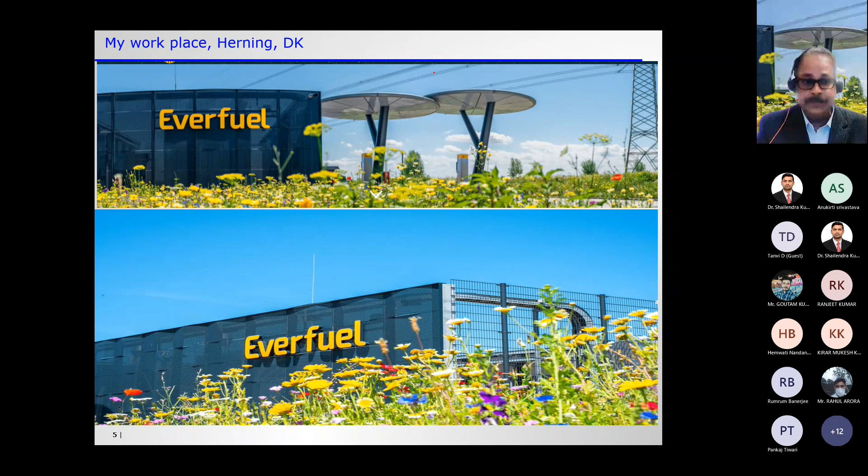Then after this, we will have a short exercise just before the break or after the break. And then we will deep dive into trends in solar and wind energy research, what is going on around the world, and what needs to be done in this solar and wind energy area. Then finally, we will look into the role of green hydrogen in grid stabilization and how it can help. Then again, we have a short exercise and then the conclusion. And after, if time permits, we will take multiple questions.

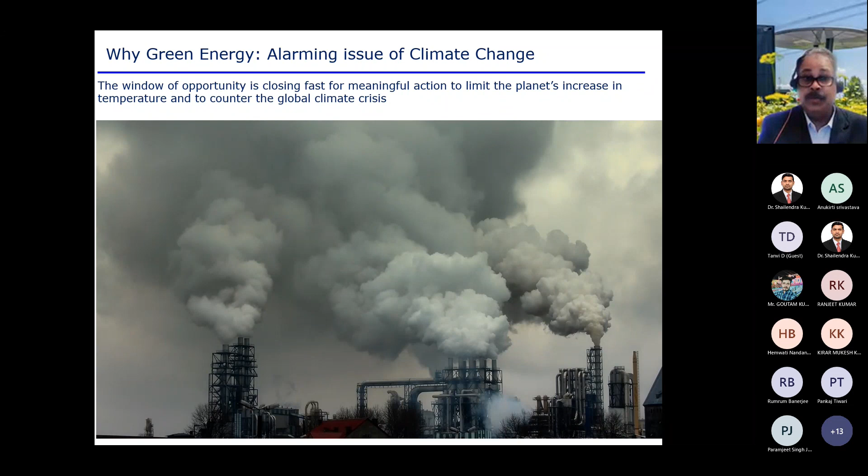So why green energy? What are the alarming issues of climate change? As I stated earlier, the window of opportunity is closing fast for meaningful action to limit the planet's increase in temperature and to counter the global climate crisis.

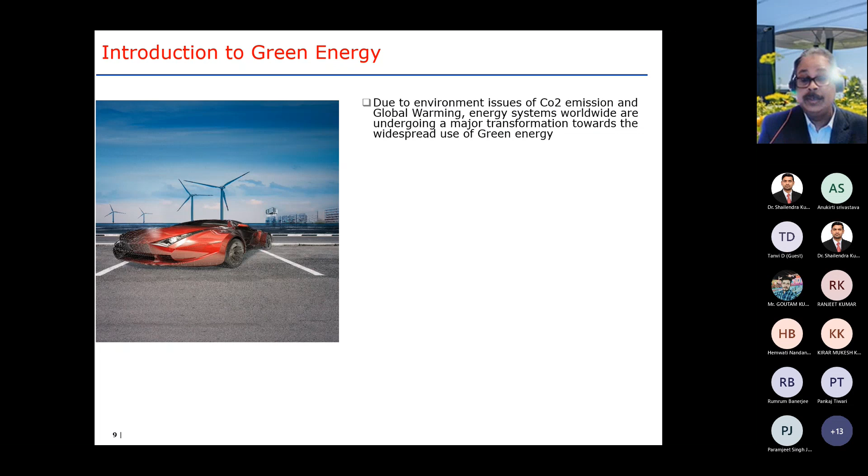We know that we can define green energy and why we need it because of environmental issues, carbon emission, carbon dioxide emission, and global warming. Energy systems worldwide are undergoing a major transformation towards the widespread use of green energy. The electrical power system in a sustainable future will augment the centralized and large grid-dependent system of today.

So forget about this 1,000 megawatt NTPC coal-fired plant, because they are now trying to convert this. There were some tie-ups with Shell and NTPC. They were trying to convert their gas turbines with hydrogen firing gas turbines. So even their existing network is converted to this green energy based generating station. So these big powerhouses with fossil fuel are the talk of past days.

To achieve this, world will increase and adopt renewable energy sources - solar, wind, and their application in terms of fuel cells. Power electronics is essential for harnessing energy from solar, wind, fuel cell, or other green energy sources. Converter, inverter, and solid state transformer - they are a must.

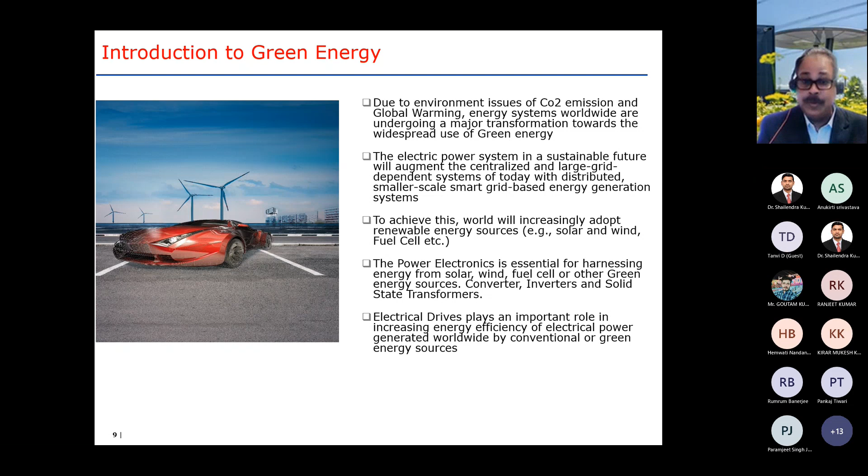Being in our community of power electronics, we must be proud to say that we are helping the energy transition of the world and saving the planet. We are the savior. Electrical drives play an important role in increasing energy efficiency of electrical power generated worldwide by conventional or green energy sources.

So what are the future green energy systems? The future energy system must necessarily deliver on three dimensions. First is providing safe, secure, and reliable energy while delivering access to all energy consumers. Supplying energy at affordable prices and assuring sustainable development.

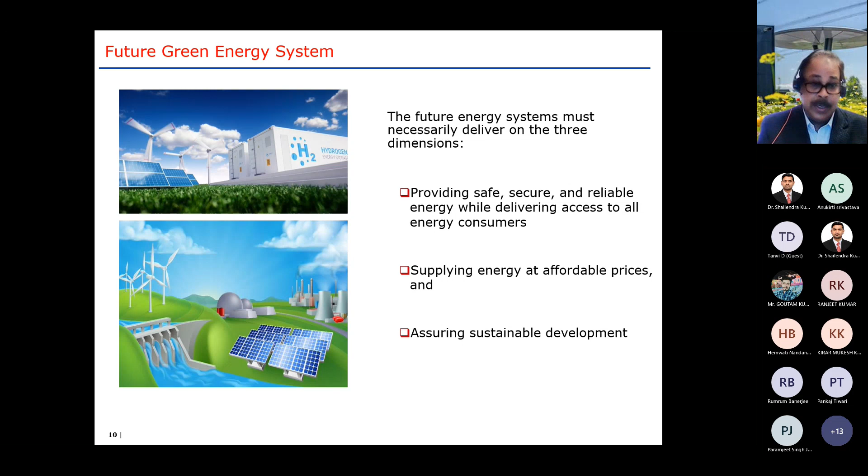And looking at these requirements, we only rely on renewable energy sources like wind, solar, hydro, and geothermal, and similar to that.

In order to develop these future green energy systems, this will involve massive changes in technical and organizational level, together with tremendous technological upgrade in different sectors, ranging from the energy generation and transmission system onto the distribution system. Of course, they will require these organizational level changes and technological upgrade.

So the whole world is transforming themselves towards this direction. These actions constitute huge science and engineering challenges and demand expert knowledge in the field to create solutions for sustainable energy systems, where the mismatch between energy supply and demand side and the infrastructure to support this must be addressed. And this must be economically, environmentally, and socially viable by meeting high security requirements.

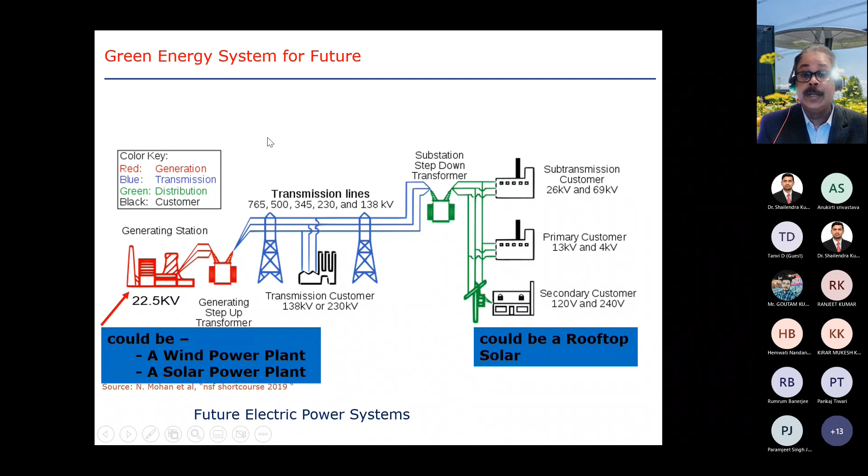So we can see that we don't have this model of generation, transmission, and distribution only, but the utilization - it utilizes some part of this network. They can also come off with feeding power to this network. So we need special consideration for the stability of the grid, and that can only be augmented when we incorporate, other than our existing customer, that electrolyzer plant as a load. So we can ramp up the hydrogen production and ramp down the hydrogen production in order to keep the electricity stable.

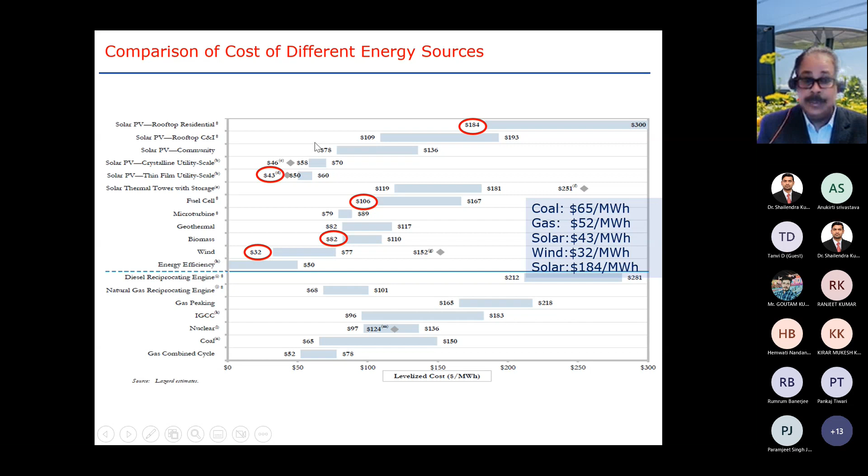When we have these green energy sources and need to connect them, we need a smart grid. In simple words, we can define this smart grid as local, so it creates energy for itself or nearby customers. It is independent, so it can disconnect from the central grid and operate by itself. And it is smart and intelligent, with the central brain or microgrid controller being where the intelligence originates.

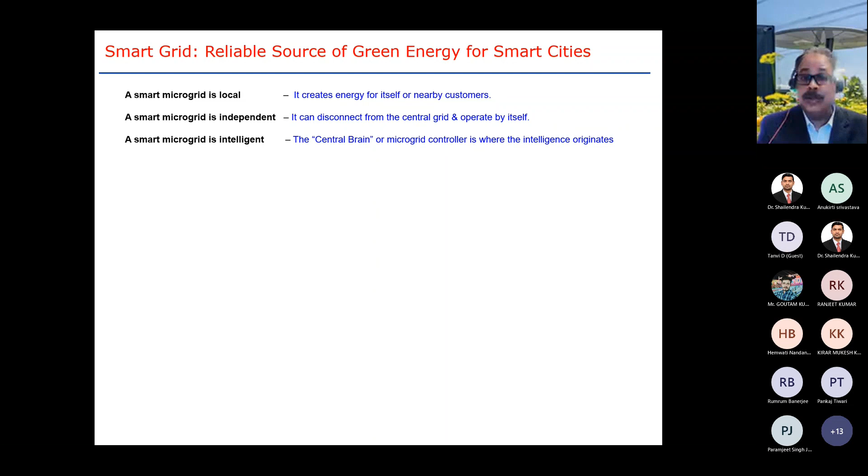We can see here the solar PV or utility plant. It can be connected or disconnected to the microgrid. This grid can have other types of generating sources like solar, storage systems, wind sources, EVs, and combined heat and power units connected here. Then this microgrid is connected with the energy market and also with weather forecasts.

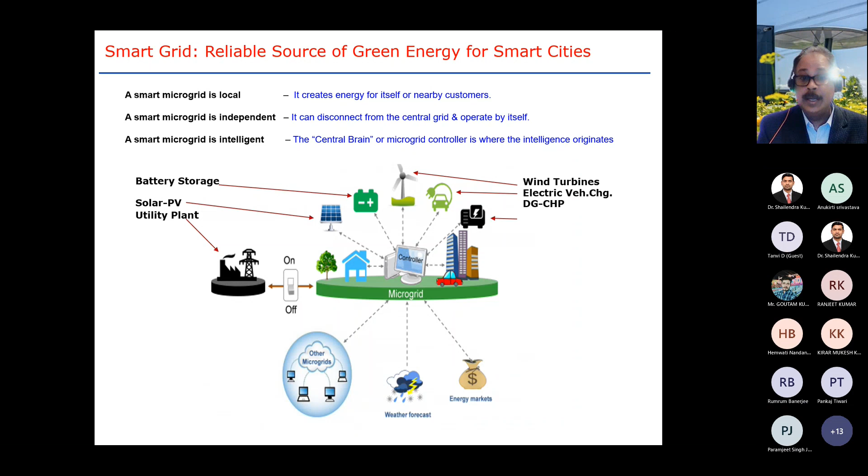This individual small microgrid is connected with other microgrids in parallel in order to have a reliable source of green energy. And this is the model which also supports future smart cities.

So how can we secure green energy sources for the next generation? If we look towards the annual world energy consumption, we can see some numbers from previous years and predictions. In 2009, total energy consumption of the world was 16 terawatt-year per year. You know kilowatt-hour, then you convert to kilowatt-days or kilowatt-year, and kilo to mega, mega to tera.

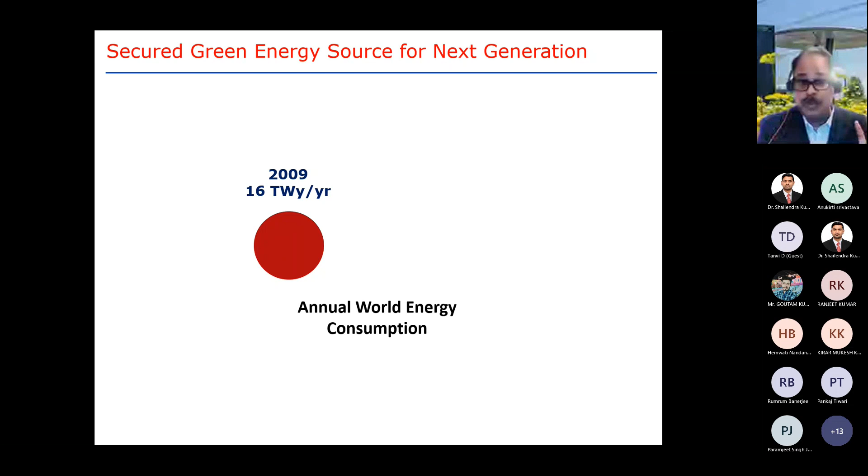So you can see how big this number in energy consumption is. In 2009, it was 16 terawatt-year consumed in the whole year, and there was a 75% increase assumed between 2009 to 2050, with requirement in 2050 being 28 terawatt-year per year.

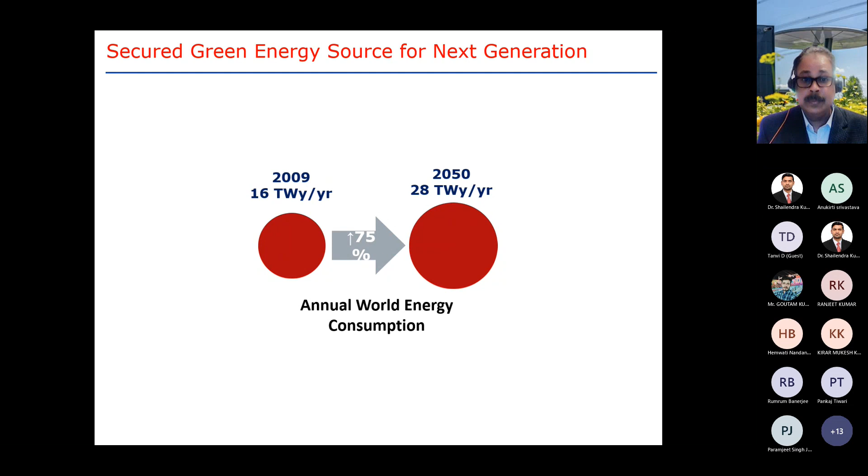So how is our energy reserve? Our total fossil fuel energy reserve in terms of coal is 900 terawatt-year, uranium 90 to 300 terawatt-year. So how many years can we run with coal? About 30 years, maybe 10 to 20 years with uranium, natural gas about 5-7 years, oil maybe 8 years, by this kind of prediction.

Hydropower stations are renewable, and they can provide 3 to 4 terawatt-year per year, so there is no limitation and we can get continuous energy from there. Wind also has the potential to provide us 25 to 70 terawatt-year per year. If we look at our demand of 28 terawatt-year per year, we can see that wind can meet this demand, and if we can build infrastructure based on wind, the world can be sustainable.

But if you look at solar availability, that is 23,000 terawatt-year per year. And if you see the capacity in terms of bubbles, these bubbles show relative size compared to energy demand needed, so this bubble will be like this. That's why when it comes to renewable or green energy, there is no limitation.

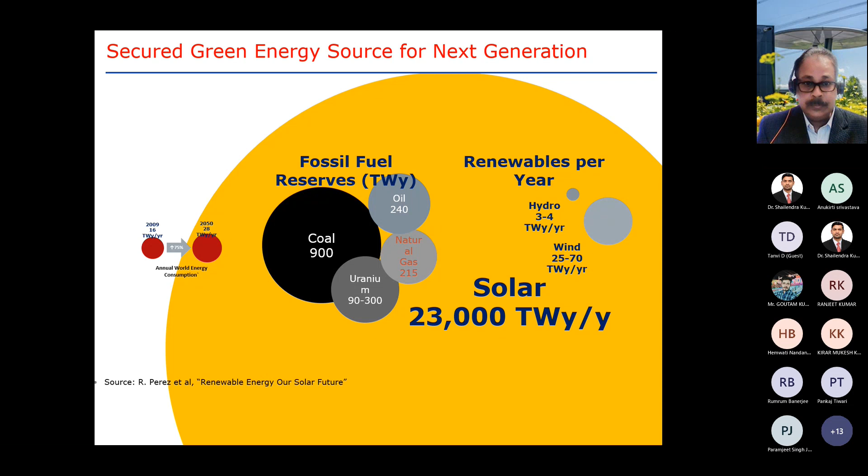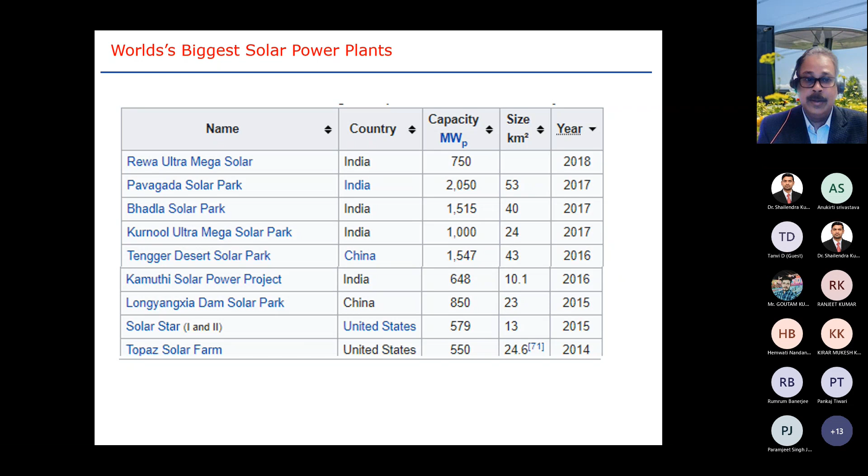If you look at some of the world's biggest solar power plants, most of them exist in India—whether it is Rewa Ultra Mega Solar, Pavagada, or Bhadla Solar Park, they are in India, and we own them.

If we look as a whole at the growth of the primary energy market from solar PV plants, you can understand it with these colors. If it is a slaty color, then it's no data or 0%, yellow is 0.1%, pink is 0.8%, and dark red is 1.2%. In this graph, you can see India is positioned very well, having more than 1.2% penetration, and the growth is continuous.

That is phenomenal. As I stated earlier, in the next few years we will be self-sufficient in energy needs, and already more than 60% is coming from renewable energy. That's a proud achievement for us.

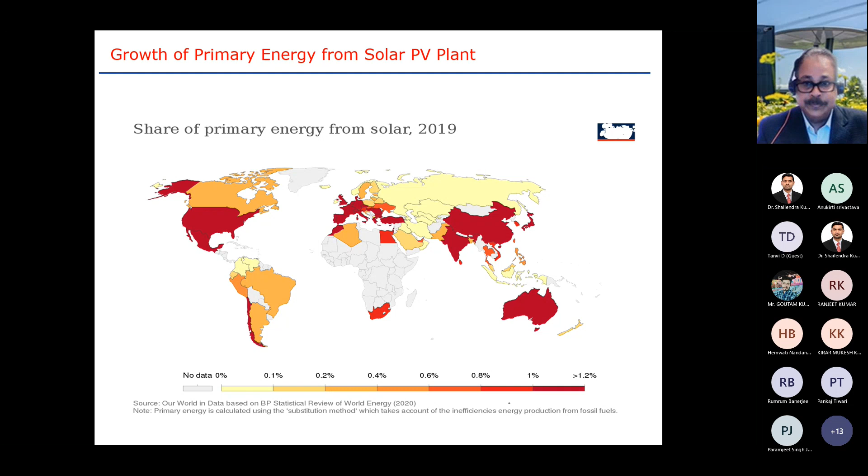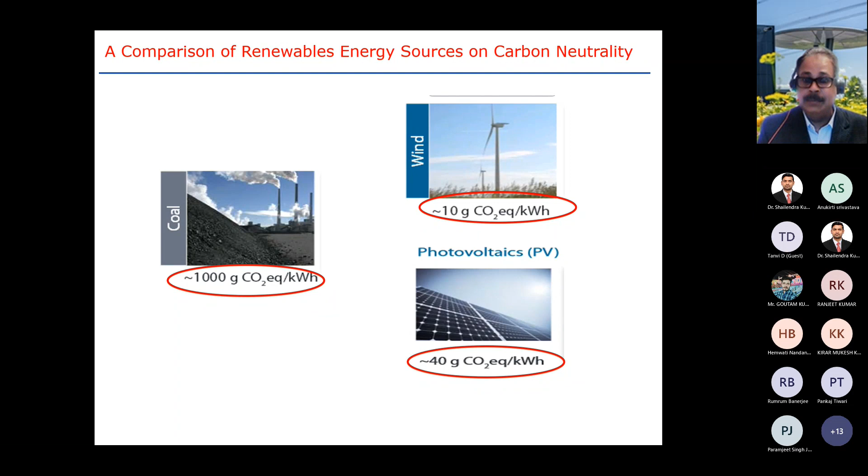Anybody can tell why wind is much cleaner compared to photovoltaic? Because the carbon emitted during the fabrication of photovoltaic panels is far, far greater compared to what is needed for making blades and the total carbon footprint of installing a wind plant.

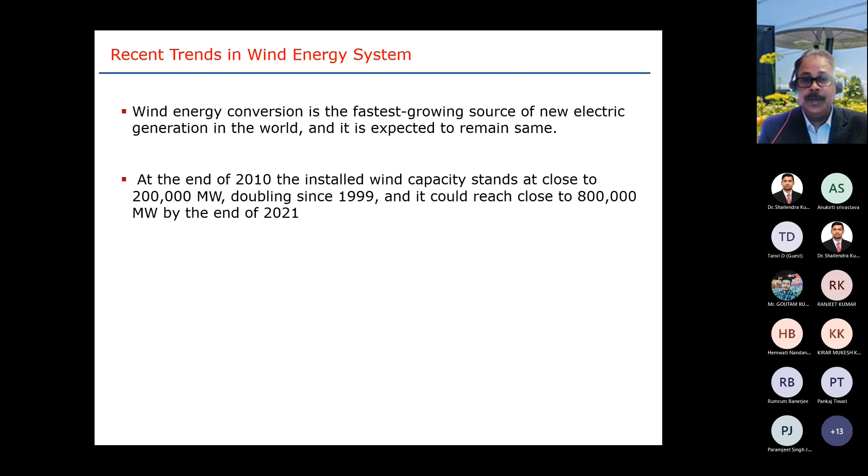So what are the recent trends in wind energy systems? Wind energy conversion is the fastest growing source of new electrical generation in the world, and it is expected to remain so. At the end of 2010, the installed wind capacity stood at close to 200,000 megawatts, doubling since 1999, and it could reach close to 800,000 megawatts by the end of 2021. The world is observing a growth rate of more than 10% each year, and today 5% of world electricity comes from wind power.

Please note that this is not the case for Denmark, because sometimes it happens that we are running our full grid generation based on wind, and sometimes we need to curtail the wind power - so much power coming from the wind plant that we need to curtail it.

And that's why when it comes to green hydrogen, this collaboration between India and Denmark is playing a great role, where the brightest minds of both countries are working towards a sustainable solution for green hydrogen, where prices will be less than $1 per kg. And that dream is not far away, because there is a lot of commitment from both sides.

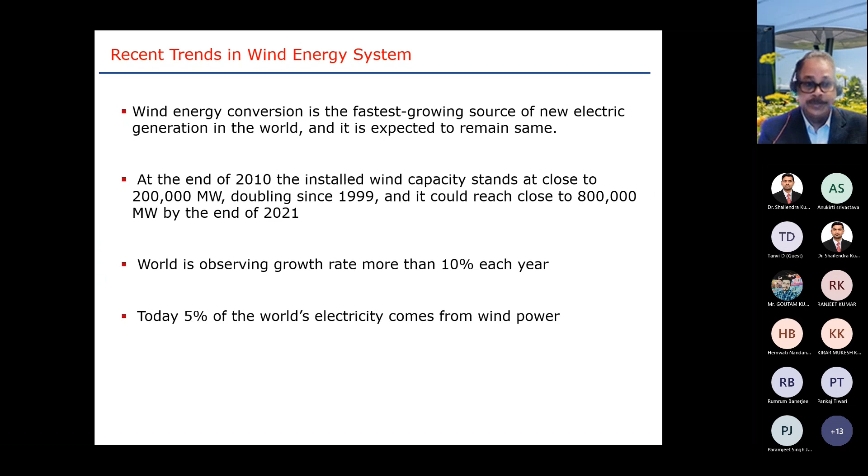And companies like Everfuel are also having very promising plans - in the next 3-4 years, they need to build around gigawatt capacity electrolyzers, and they need to provide green hydrogen station infrastructure for hard-to-abate sectors like heavy duty trucks and buses.

So these are the numbers I was talking about, and you see there is negligible growth in their footprint until 2000. But suddenly, the world is more and more cautious, and then you see this exponential growth, which is going beyond 800,000 megawatt, and it is going further.

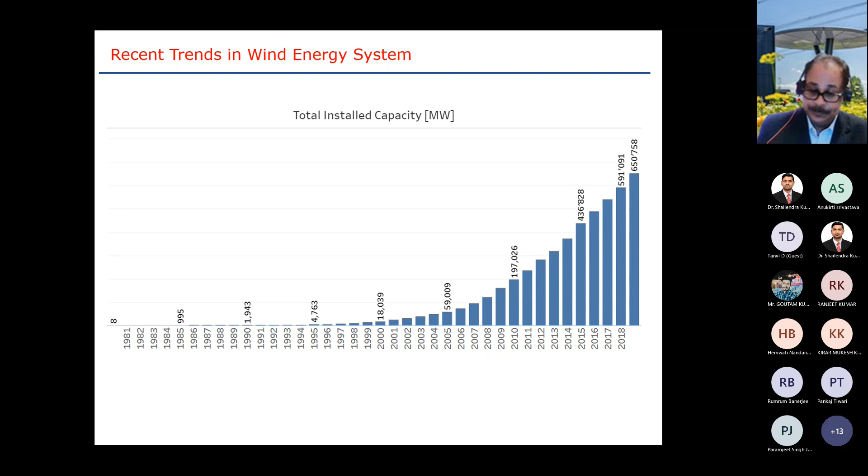So when we say that, what are the recent trends in wind energy systems? Harnessing wind energy for electrical power generation is an area of great research interest, and emphasis is given to the cost-effective utilization of this energy resource for quality and reliable power supply.

During the last two decades, wind turbines have been developed in size from 20 kilowatt to 12 megawatt, while even larger wind turbines are under investigation. A lot of different concepts have been developed and tested. One important development is on the electrical machine, the generator, where new concepts have also been industrially implemented.

Before moving to this part, I would like to mention that a new trend comes in the wind park and wind plant, where the power we generate is first converted to DC, then through a converter, and then using long cables connecting to the grid. And that grid supplies data centers or big consumers of electricity.

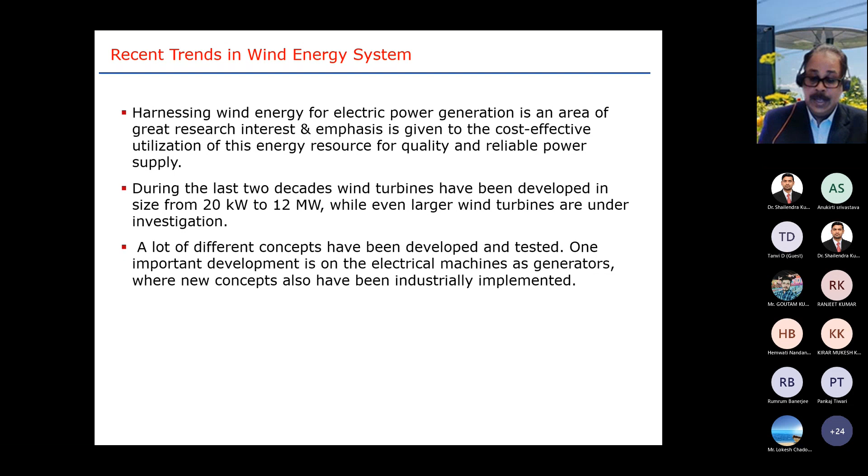So I was talking about what research trend is in the wind energy system, and that mainly it is going on the machines, and then which machine is used as generator. And if we see this comparison, we will find how this trend is going on, but I will come to that in the next slide.

Before that, there are some conclusions, like an important issue for wind turbines is the efficiency. Efficiency is important when comparing different systems, because losses reduce the average production by the wind energy converter and thereby reduce income. The various wind energy converter systems are able to obtain maximum power output for varying wind speed. Moreover, wind turbine and generator adaptation should also be taken into account. The generator choice is based on turbine size and wind class.

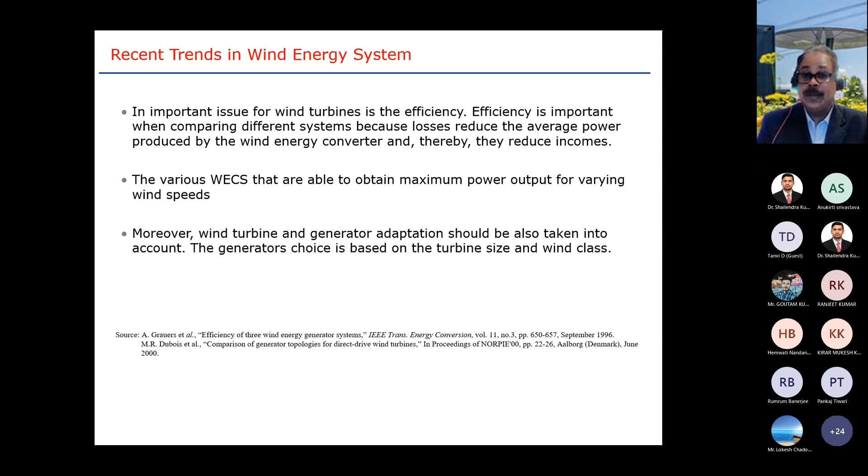So if we look at it, we see that the doubly-fed asynchronous generator was introduced worldwide in the 90s, and then the world shifted towards the permanent magnet synchronous generator, direct driven or geared. So we increased the efficiency by a large amount, but nowadays we are talking about superconductor based generators, and there are some pilot plants running offshore near the UK, and DTU, Denmark Technical University, is supporting such research investigation with Siemens.

And this is possible because in a synchronous generator, we have our stator winding. It is stationary, and it can be cooled by special means, and then we can reduce the ohmic losses in the stator winding. And that way, we will have great power quality. We have efficiency at all loads, and of course it is smaller and lighter, and we can also avoid the gear, and subsequently we can avoid the losses.

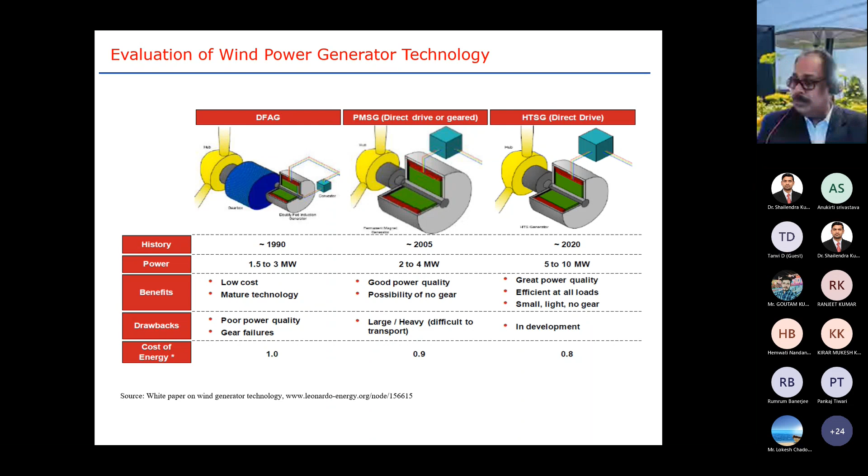So according to time management, I have 10 minutes more, and then we will jump to our first assignment.

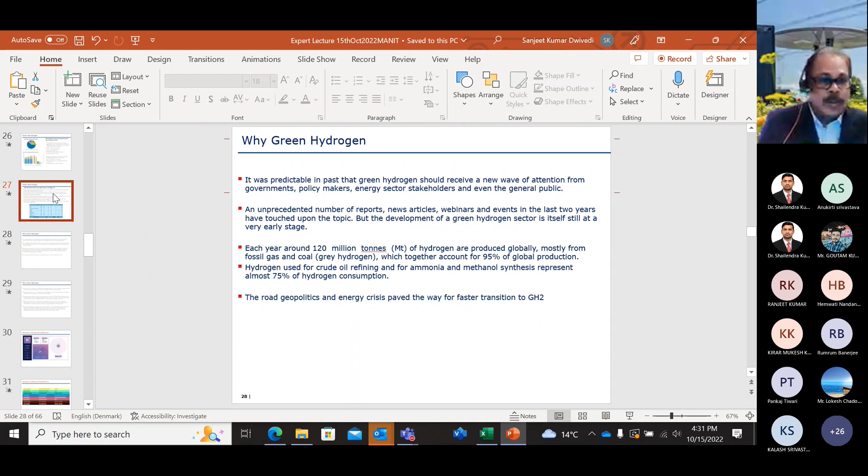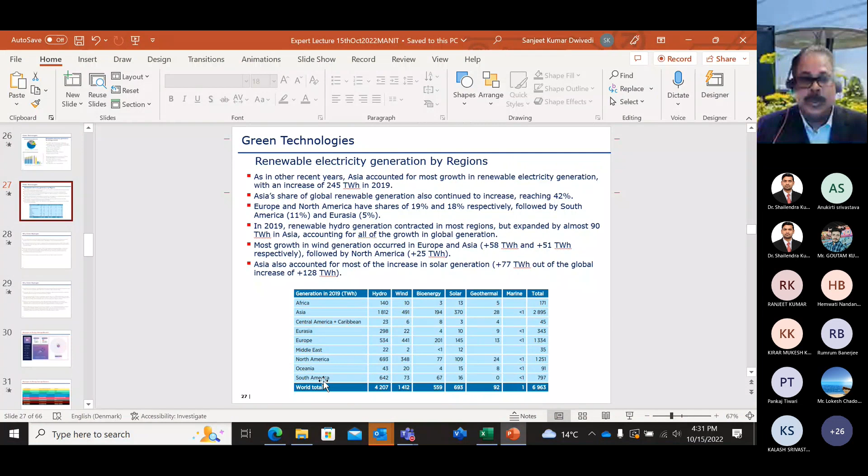So we were talking about green hydrogen, green technologies, comparison of that, and then we move to renewable electricity generation by region. These numbers are quite interesting, and we can be proud that Asia is leading in renewable electricity generation. Of course, the major share is from China, but India is also coping up and contributing. If you compare North America, that is 693, but 1812 terawatt hours are generated from Asia. Similarly, Europe is 534, so Asia is more than 3 times.

And most of the energy is from hydro, wind, bioenergy, solar and geothermal energy. I was only comparing the hydro energy part, but if you see the total, this is around 3,000 terawatt hours from Asia, and from North America it is around 1,250 terawatt hours. So more than 2 times. From Europe, it is 1334, so again more than 2 times.

Asia also accounted for most of the increase in solar generation, 77 terawatt hours out of the global increase of 128 terawatt hours. So most goes to Asia. Growth in wind generation occurred in Europe and Asia, 58 and 51 terawatt hours, followed by North America. Europe has a geolocation that supports wind. Most European countries are surrounded by sea, the main cause of wind movement, so wind generation is largely suited to them.

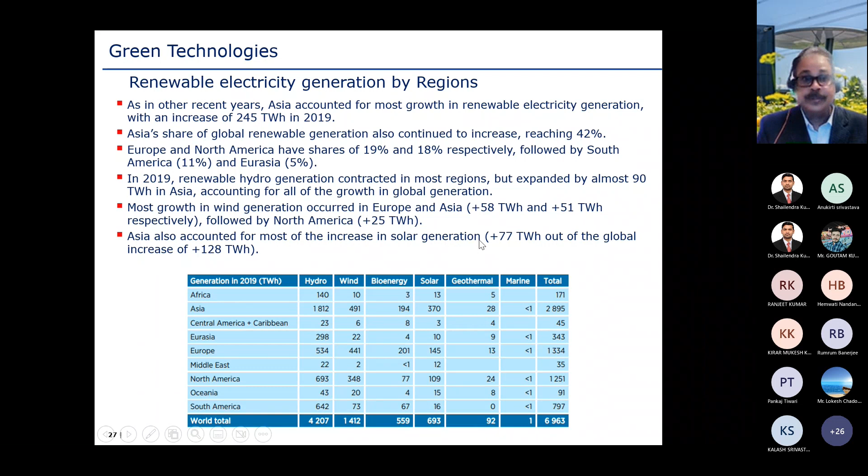In 2019, renewable hydro generation contracted in most regions but expanded by almost 90 terawatt hours in Asia, accounting for all growth in global generation. So after discussing renewable energy, its growth and market share, we again come to the question: why green hydrogen? It was predictable that green hydrogen should receive a new wave of attention from governments, policymakers, energy sector stakeholders, and even the general public. It was predictable, but there was some uncertainty, and I will come to how these uncertainties have gone away now.

An unprecedented number of reports, news articles, webinars and events in the last 2 years touched upon the topic. But the green hydrogen sector itself is still at a very early stage. Each year, around 120 million tons of hydrogen are produced globally, mostly from fossil gas and coal. From fossil gas we call it gray hydrogen, and from coal especially, black hydrogen, which together account for 95% of global production. Hydrogen used for crude oil refining and ammonia and methanol synthesis represents almost 75% of hydrogen consumption. And now comes the reason.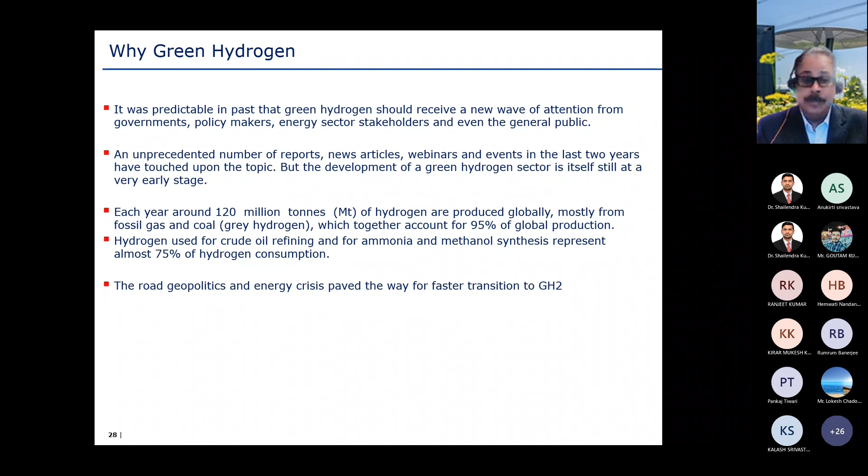So now, real-time developments, the geopolitics and this energy crisis, the Russia-Ukraine war, and many other things created a need from the policymaker side, from the people, and also from the market side. According to the roadmap, every country is having its roadmap. Most optimistic is India's green hydrogen journey, where we want a $1 trillion green hydrogen economy by 2030. By 2050, green hydrogen needs to have far greater dimension than today.

Production reaching 400 million tons, equivalent to 49 exajoules. Producing that much would require a significant scale of electrolyzers, with total installed capacity growing to 5 terawatts. The electricity demand to produce hydrogen reaches close to 21,000 terawatt hours per year. Achieving these ambitious numbers will be a major challenge, but this International Renewable Energy Agency report described that this challenge can be met through a wide range of policies.

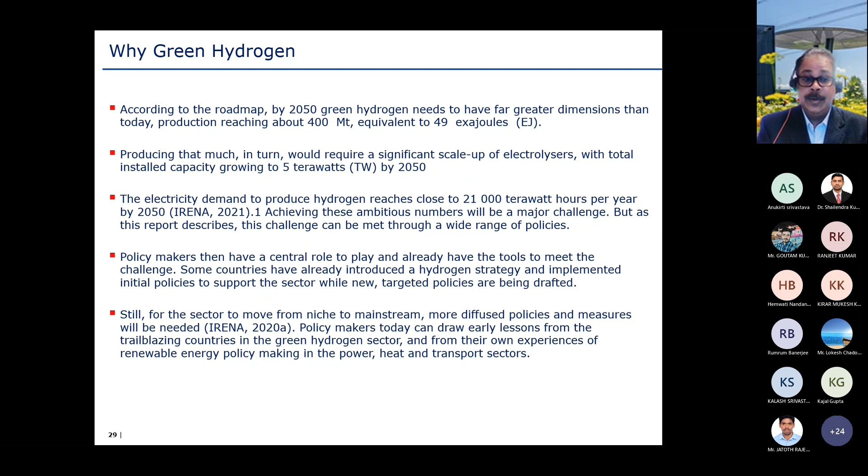Policymakers then have a central role to play and already have the tools to meet the challenge. Some countries have already introduced hydrogen strategies and implemented initial policies to support the sector, while new targeted policies are being drafted. Still, for the sector to move from niche to mainstream, more diffuse policies and measures will be needed. Policymakers today can draw early lessons from the trailblazing countries in the green hydrogen sector and from their own experience of renewable energy policy making in the power, heat, and transport sectors.

So just to jump to hydrogen as an energy element, we see its melting point is 13.81 Kelvin. We know that 0 Kelvin is minus 273 degrees centigrade. So it's 273 minus 20, that is 53, so it is around minus 253. That's the boiling point of hydrogen. So it becomes gas beyond that.

And you see electronegativity is 2.1, ionization potential is 13.598 electron volts. In this configuration, we see that it's a non-metal, atomic weight 1.00794, and other things. Its density is 0.0898 grams per liter. That's very interesting. Please keep focus on this density, because one of our numerical questions comes on that.

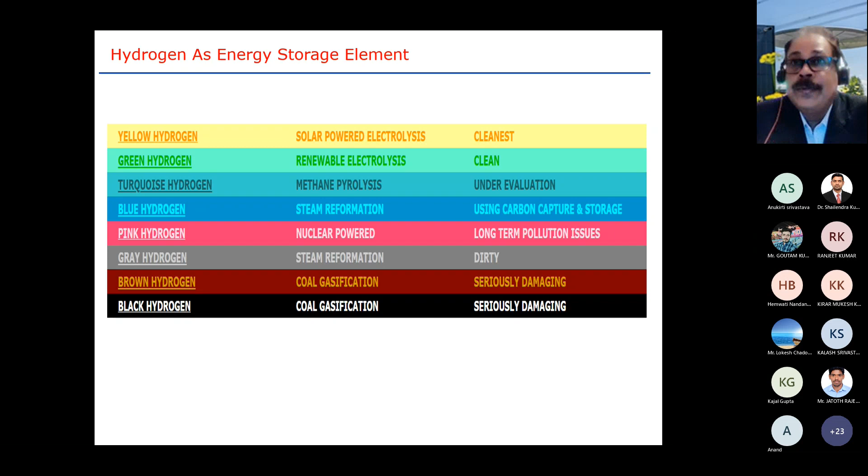So if we classify hydrogen as an energy storage element, we need to classify the color of hydrogen. This color signifies the source of the hydrogen, whether it is generated from fossil fuel. If it is from fossil fuel, including coal or gas, generally we can name it black hydrogen. But if it is coal specifically, then we say brown hydrogen. If it is steam reformation, then this is gray hydrogen. If it is using nuclear power and electrolysis, then pink hydrogen.

If it is using steam reformation, but during the steam reformation, whatever the carbon emission, we capture that much carbon, then this is known as blue hydrogen. So during the process of gray hydrogen, brown hydrogen, or black hydrogen, if we can capture whatever carbon emission takes place during hydrogen generation and store that, then we can certify that hydrogen as blue hydrogen.

Then turquoise hydrogen. If we are using methane pyrolysis, the chemical process by which hydrogen is generated, and the certified color of hydrogen is turquoise, then it is methane pyrolysis based hydrogen. Please note that hydrogen is a colorless gas. You can't see any color on hydrogen. It is only the certification.

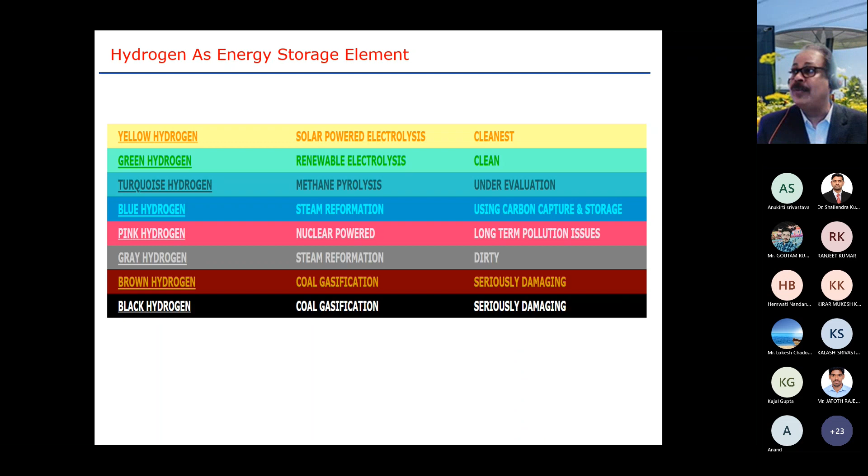So if we are using any renewable energy source for electrolysis, then the produced hydrogen is green hydrogen. And most importantly, if we are using solar energy for electrolysis, then this hydrogen is yellow hydrogen. So green hydrogen cannot always be yellow hydrogen, but yellow hydrogen can be both yellow hydrogen and green hydrogen. You got my point. Now comes hydrogen as an energy storage element.

So there are three forms of hydrogen, as I told you: below minus 253 degrees centigrade, or below minus 260 degrees centigrade, or exactly the number is here. It is gas, liquid, but the solid number is not here. But you see that for hydrogen, its boiling point is minus 252.8 degrees. Melting point they have not noted here, but energy density is 141.8 megajoules per kg.

So this is the important number, and it is not changing when changing gas to liquid. Methane is 55.7 and gasoline is 44.4. So hydrogen is how many times superior? Almost 3 times superior to gasoline and methane in terms of energy density.

But if it comes to volumetric energy density, megajoules per liter, then we see that gasoline has a big number, because volume-wise hydrogen is a very rare gas and very lightweight, 11 times lighter than air, so it occupies more space. Specific gravity is 0.07 kg per meter cube, compared to gasoline 0.7. And please keep an open eye on these numbers, because there were questions around this. Of course hints will be there, but you need to be focused on this slide.

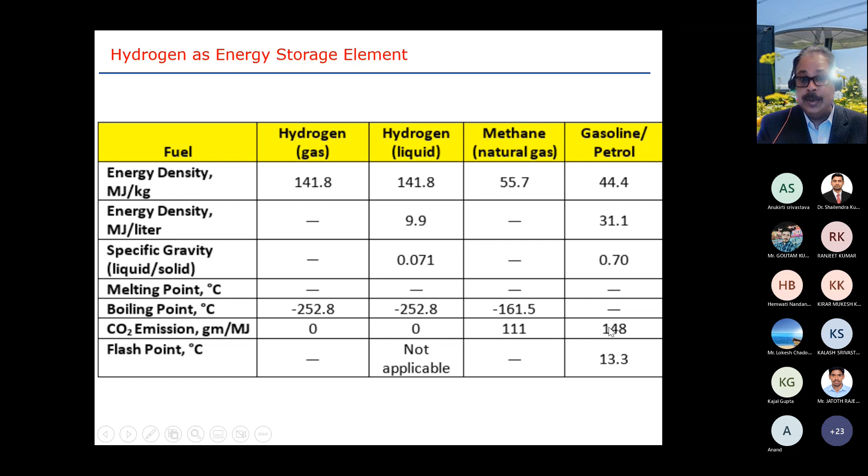And then flash point: there is no flash point in hydrogen, but in gasoline there is a flash point at 13.3 degrees centigrade. And CO2 emission, we see 0 for hydrogen, 111 grams per megajoule, and here 148 grams per megajoule. So what we conclude: on a weight basis, hydrogen has a high energy density, around 3 times greater than most fossil fuels. This high energy density makes hydrogen an attractive replacement for fossil fuels such as methane and gasoline. So that's the advantage we need to keep in mind, 3 times higher energy density of hydrogen.

Hydrogen has a very, very low boiling point, around minus 250 degrees centigrade. It's just 20 degrees above absolute zero. Hence, it requires a lot of energy to convert the gas to a liquid. Normally at room temperature, or at any temperature above minus 253, it is a gas. So if from room temperature you need to reduce the temperature to minus 253 degrees, you know how much energy it consumes. So it's very energy intensive work to convert hydrogen from gaseous form to liquid form.

And liquefied hydrogen is currently used in special applications such as space missions. This is a very interesting fact: if you look at the technology readiness level of space applications, it is almost 9 to 10, because this liquid cryogenic technology and liquefied hydrogen use in rocket engines has reached the highest level of technological advancement. And we need to bifurcate to lower niche applications, like buses, cars, motorcycles, and scooters. So it is not a big challenge in terms of technological adaptation, but of course it will take its own time. It's not a one day thing.

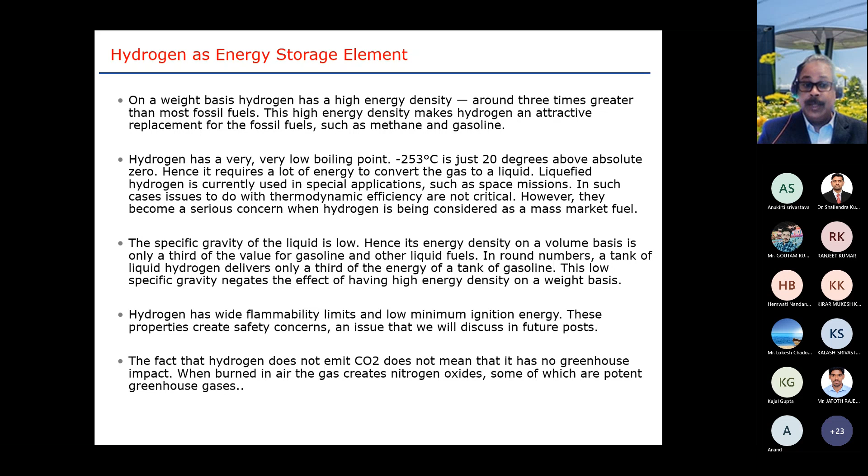Hydrogen has a wide flammability limit and low minimum ignition energy. These properties create safety concerns, an issue that will need to be addressed. In fact, hydrogen does not emit CO2, but that does not mean it has no greenhouse impact. When burned in air, the gas creates nitrogen oxides, some of which are potent greenhouse gases. And itself, if we release hydrogen to the atmosphere, it has an impact as a greenhouse gas.

So if you look at the volumetric energy density of hydrogen in practice, you will find that the volumetric density of gaseous hydrogen at atmospheric pressure is 0.09 kg per meter cube. Keep this number in mind. Consequently, under normal conditions, much space is required to store gaseous hydrogen. Therefore, hydrogen is virtually not stored or transported in gaseous form at atmospheric pressure because it's simply not efficient. So never ever will we transmit or distribute hydrogen from one place to another at normal pressure. We need to increase the pressure.

At a pressure of 350 bar, the volumetric density of gaseous hydrogen is around 26.1 kilograms per meter cube. So by increasing pressure from our atmospheric pressure of 1 bar to 350 bar, you see that it's around 300 times or more. We have this volumetric energy density increase.

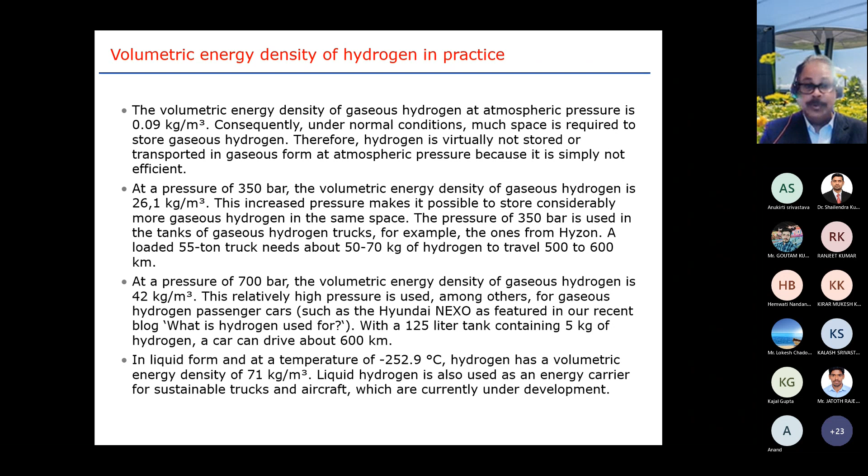In liquid form, at a temperature of minus 252.9 degrees centigrade, hydrogen has a volumetric energy density of 71 kg per meter cube. So if you reduce the temperature to cryogenic form, we can further increase this energy density. Liquid hydrogen is also used as an energy carrier for sustainable trucks and aircraft, which are currently under development.

If we look at volumetric versus gravimetric energy density - volumetric is kilogram per meter cube, and gravimetric is megajoule per kg. When we distribute all our fuels - biodiesel, diesel, LPG, LNG, and natural gas - they are here in this range, but hydrogen, you see, is here.

If you increase the storage pressure or convert to liquid, you're still not getting an advantage in volumetric comparison compared to other fuels. But in gravimetric comparison, it's very high compared to other fuels. That's the advantage.

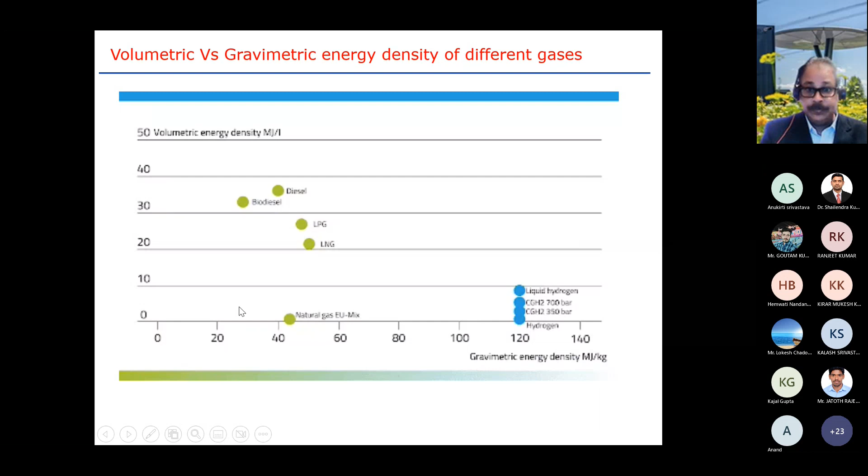If you look at energy storage elements like lithium battery, lithium ion battery, alkaline battery, hydride battery, lead acid battery - how they are placed in terms of volumetric versus gravimetric energy density - batteries are located here, liquid fuel is here, and gaseous fuel is here.

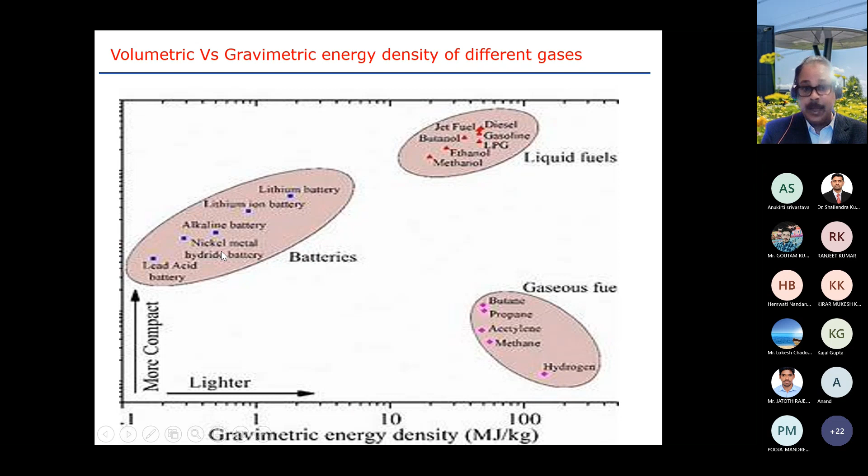Among all gaseous fuels like propane, butane, acetylene, and methane, hydrogen has a lower volumetric energy density - kilogram per meter cube - so that is lower when comparing with other batteries as energy storage elements or with liquid fuel.

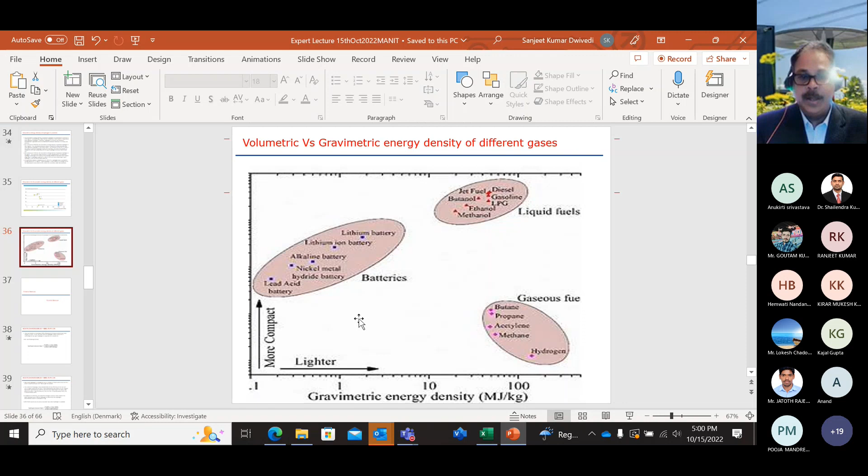So now all participants are requested to look at this numerical problem: how much hydrogen do I need in my car, based on these data? Your car is equipped with a fuel cell and inverter, and the drive system is running at 51% efficiency. You need 8 hours to drive from Bhopal to Delhi. If the low heat value of hydrogen used in your fuel cell or car drive system is 120 megajoule per kg...

So, how many kg of hydrogen is required for a round trip? Is the question clear to everybody?

So the efficiency is 51%. Low heat value of hydrogen is 120 megajoule per kg, and you need to drive a car to reach from Bhopal to Delhi in 8 hours, and you need to make a round trip. Hint: there's a simple formula that will give you this calculation.

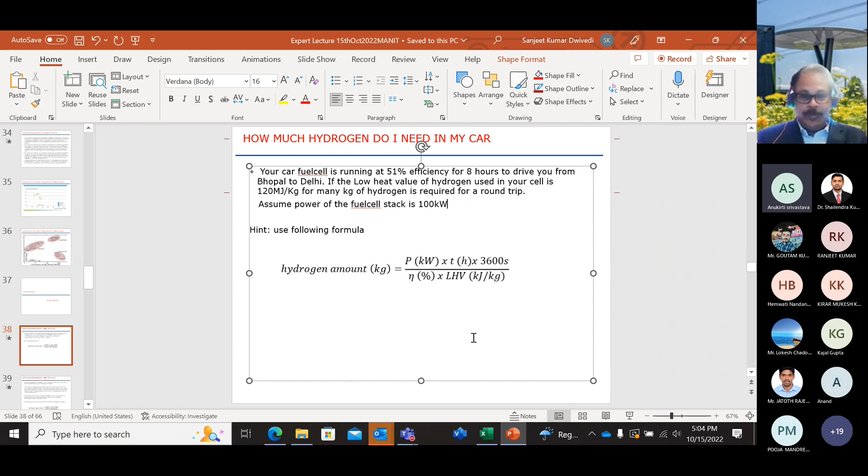Any idea how much hydrogen? 100 gram, 1 kg, 100 kg, 500 kg - how much is needed? Any number comes, any calculation, any calculator, give the result. The hydrogen amount is 47058.82. What, gram, kilogram, milligram? 470 grams.

Can you check it one more time? Okay, let's do it step by step, then you will see. So we are having 470 grams as one answer. And Miss, what did you get? How much? 47058.82.

Sir, are you doing it like this? 470.58 grams only is coming. Okay, 470.5 grams - then something is wrong. So how do we need to solve it, sir? 40 kg, 40 kg. It's maybe reaching the value, but we are doing some mistake. It's off, totally off, but it's coming in the range.

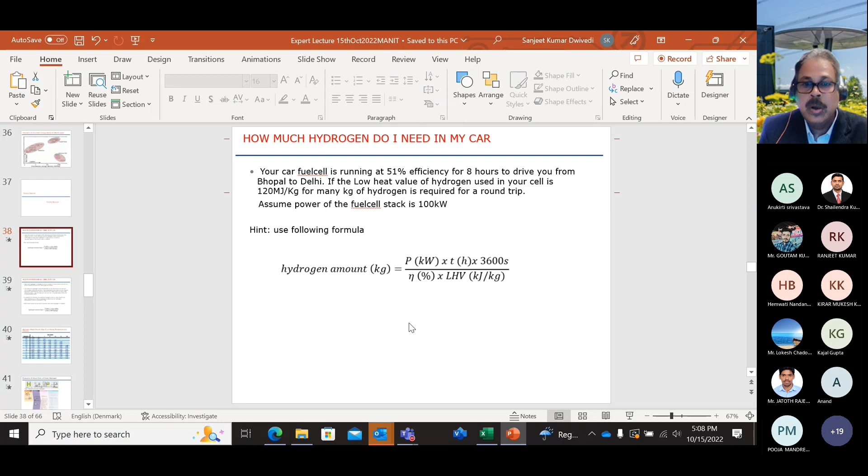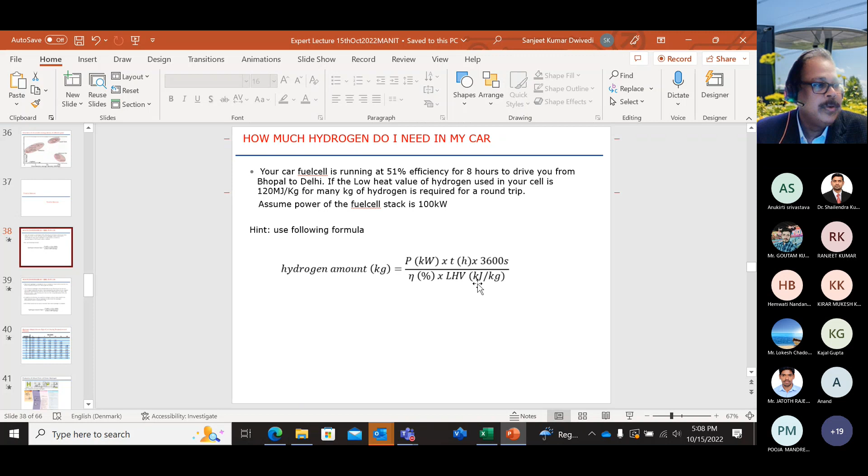Sir, LHV should be in kilojoule. Which energy? LHV, that's it. You're right - energy is given in 120 megajoules, so in the formula we need to convert it to kilojoules, that's why. Yes, you're right. So it will be how much? Sir, then it will be 470.588 grams only. It is something - somewhere we are doing wrong. I don't know where.

Okay, assume that with these numbers we are correct. But what's interesting is it's a round trip, so you need to double it - that's the answer. And we need to consider this efficiency of the fuel cell, and this efficiency can be the efficiency of the electrolyzer also. Got my point?

LHV of hydrogen, that will be the same. So if somebody asks you that the electrolyzer plant is running with such an efficiency and this capacity of electrolyzer plant is so many kilowatts, how much hydrogen will come out? So you can calculate like here.

So how much hydrogen per hour - if you keep it as one and multiply by kilowatt, by 3600, and divide by efficiency of electrolyzer, this way you can also calculate how much hydrogen is produced. Okay, so you got the idea? By a simple calculation, you will get some value, and there will be some number.

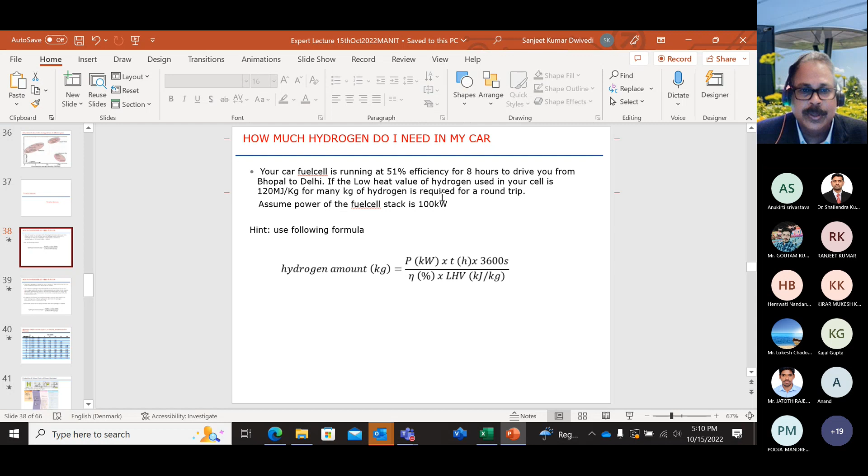I don't know what is the exact number, because I have not calculated it before, but from where I took this example problem, something like 94 kg was coming, but their power size was different, and it was only one way trip. So there were some changes.

So we agreed on how it works. We have this here - we are having the description to put it in, and it's a simple calculation.

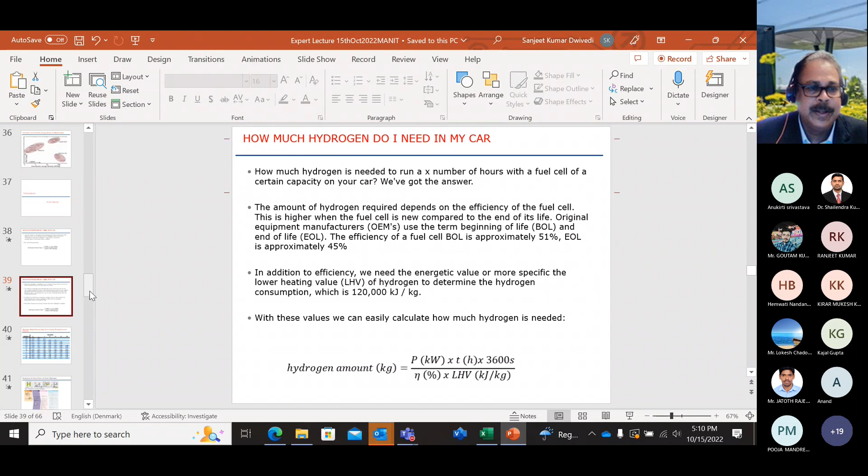Now we jump to the very interesting property of hydrogen, that it is not an ideal gas. Everybody knows this. So how does this affect hydrogen weight per volume at varying temperature and pressure - that gets changed.

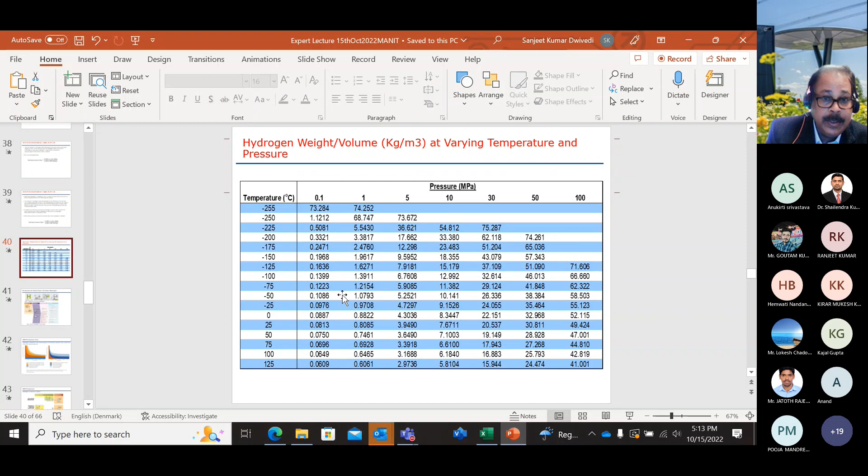So after this table, which is quite interesting, we are going to use it in the next numerical.

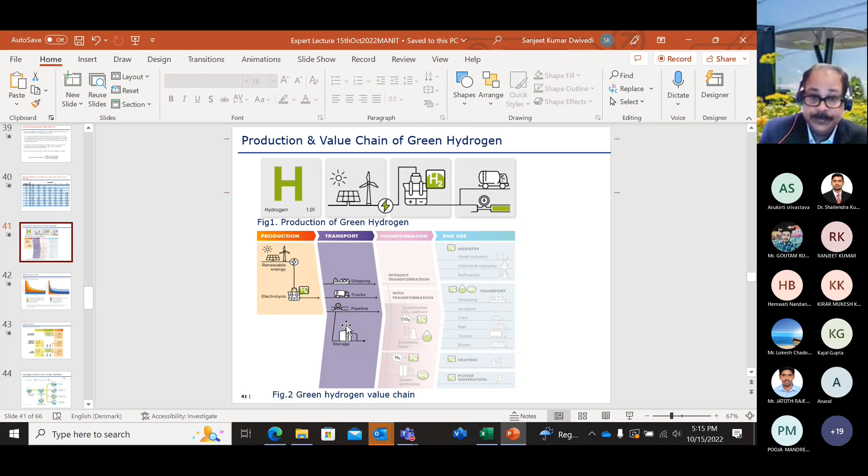So it's very important that we will talk about levelized cost of hydrogen. Do you know that? How can I keep this display in back?

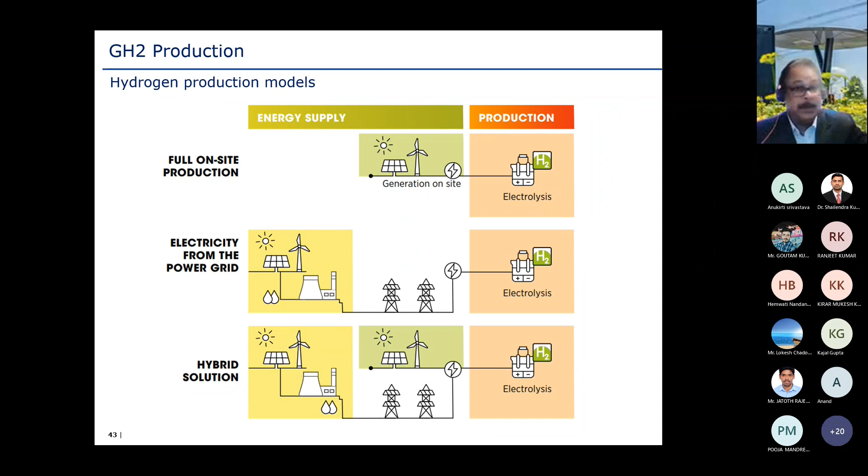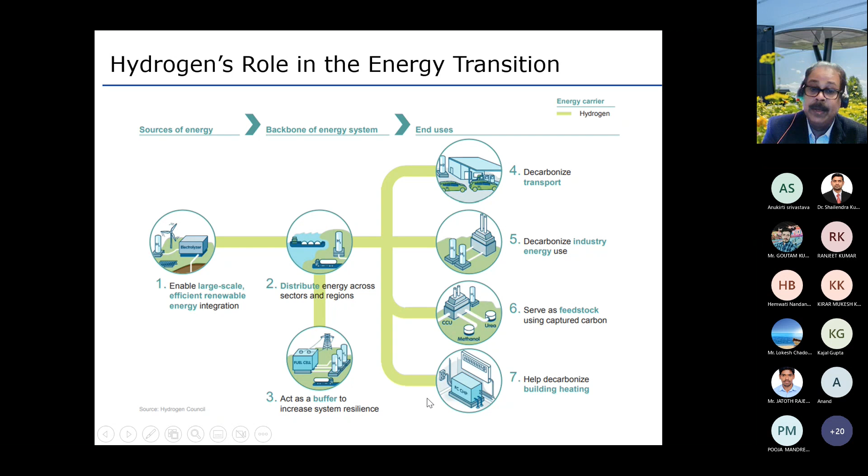In the end use, we can use this green hydrogen in the transport sector to decarbonize transport or industry use. There we can reduce carbon use and serve as feedstock using captured carbon. When generating urea or methanol, green hydrogen acts as a feedstock, and it also helps decarbonize building heating. Instead of burning fossil fuel, we can use green hydrogen there.

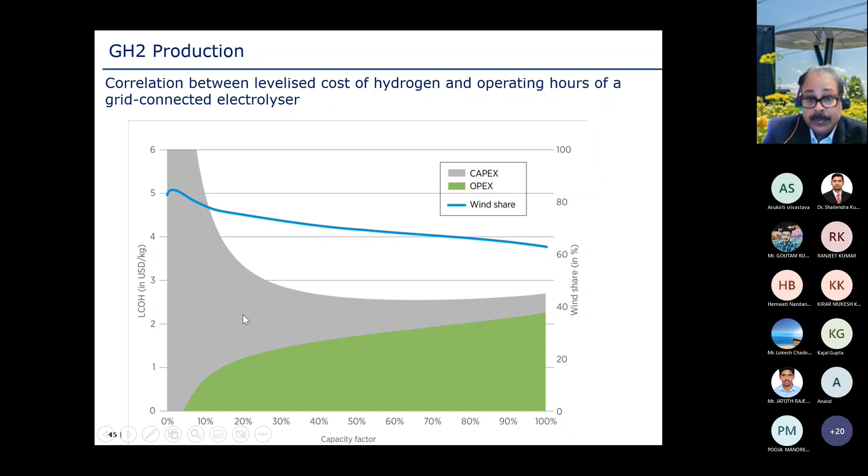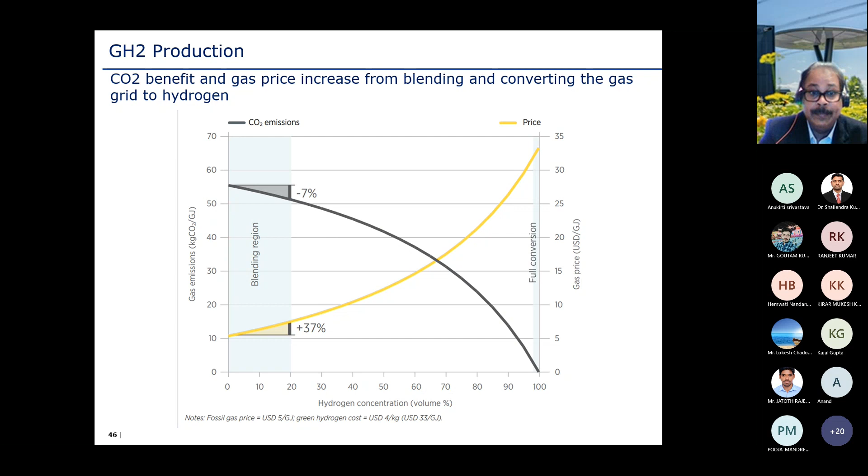Here you see the green hydrogen production CO2 benefit. If in an existing gas pipeline you introduce green hydrogen to compensate carbon dioxide emissions - for example, if you reduce natural gas by 20% and add 20% hydrogen, you can get a benefit in gas emissions from about 55% to 50%, so a 5% reduction. But the cost of the system can increase by 37%. This might be reduced now because gas prices have increased, but on this model we can say the cost benefit is not directly proportional - it is manifold, many times compared to it. So here it's about 5 times extra cost we need to pay.

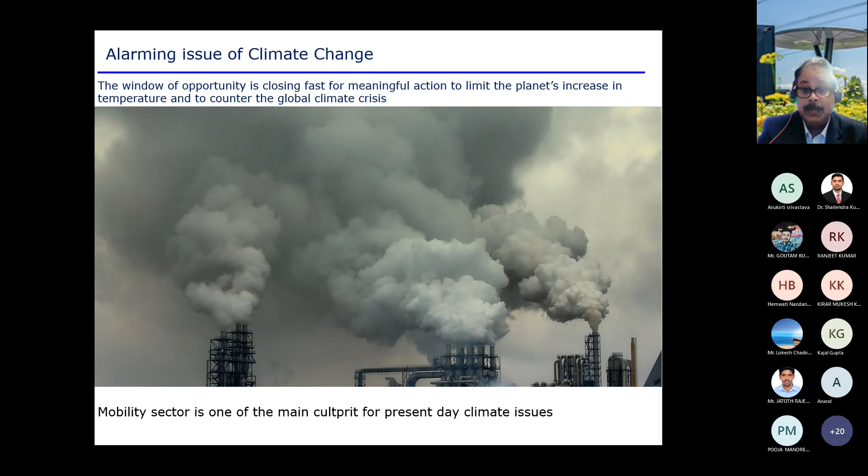So then in the end, we are reaching to this again - I'm showing this with the clear message that the window of opportunity is closing fast for any meaningful action. We can also say that the mobility sector is one of the main culprits for today's climate issue, and in this mobility sector, hydrogen mobility technology has tremendous potential to compensate these carbon emissions.

With different TRL levels, we see that space travel reaches 9 TRL level. Industrial trucks are at 8 to 9 level. Stationary applications also reach 8 to 9. Passenger cars are around 8. Light rail is at around 7. Aviation still needs to grow - we have some technology gaps there. Shunting locomotives are around 6 to 7 TRL level, and shipping has a technical gap there too. Motorcycles and lorries, as I mentioned earlier, also need to increase their TRL level. So considerable effort is needed to meet this technology gap and to use green H2 in the mobility sector.

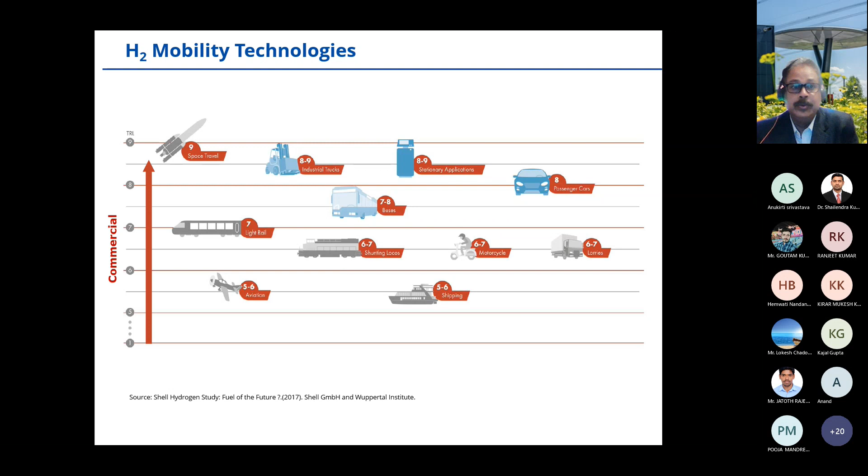This is the full value chain utilization - you generate green hydrogen here, and then you consume it here. At the same time, you have a way to interconnect with smart storage, connect with the fuel cell, and connect this seamlessly. This smart full value chain ensures zero carbon emission and zero carbon dioxide generated from the environment. This is one way where we are integrating industry with the power stations.

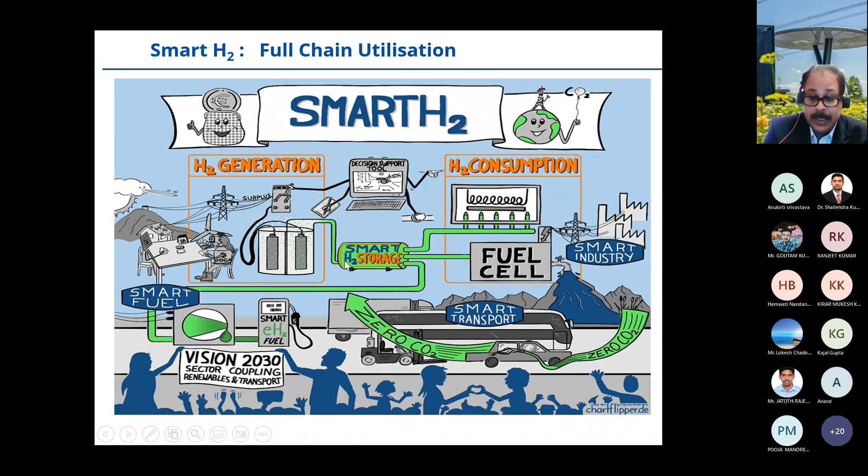Through green hydrogen. And then for smart H2 for the future, hydrogen has the potential to fuel the economy while emitting nothing but clean water. And we are at a leading edge of the hydrogen revolution. The world must finally tap into hydrogen's potential to play a key role in a clean, secure, and affordable energy future.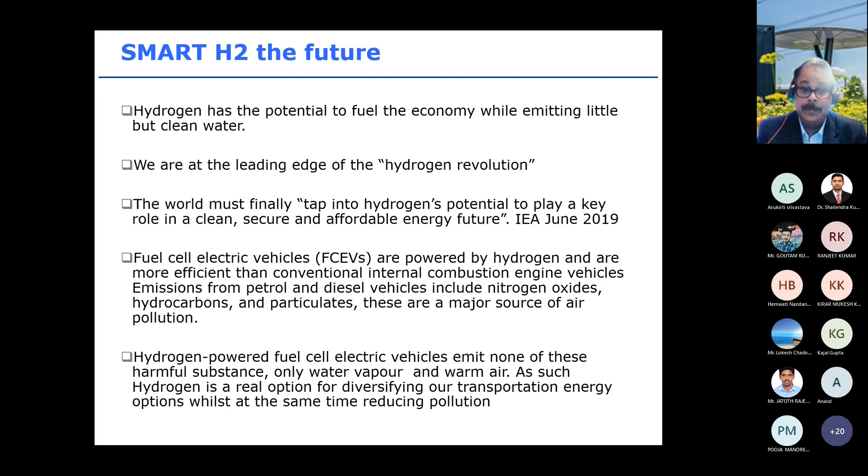FCEVs are powered by hydrogen and are more efficient than the conventional internal combustion engine. Hydrogen-powered fuel cell electric vehicles emit none of these harmful substances. Only water is a product, and hydrogen is a real option for diversifying our transportation energy options while at the same time reducing pollution.

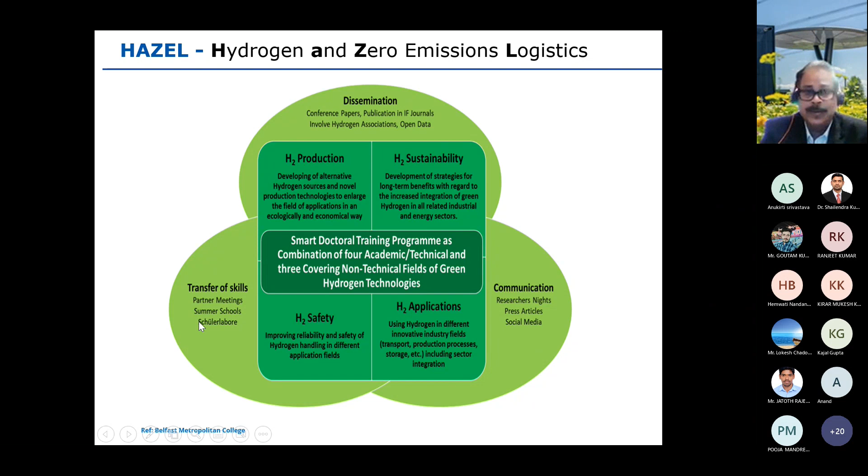So this is a model of hydrogen and zero emission logistics, where we see the dissemination of how we can go from production to application while considering sustainability and safety during this process. There is a model from Belfast Metropolitan College of how they work with transfer of skills, dissemination of knowledge and communication. I will skip this, and these green hydrogen based city buses are reality now, and the world is moving in that direction. There are many players who are making this.

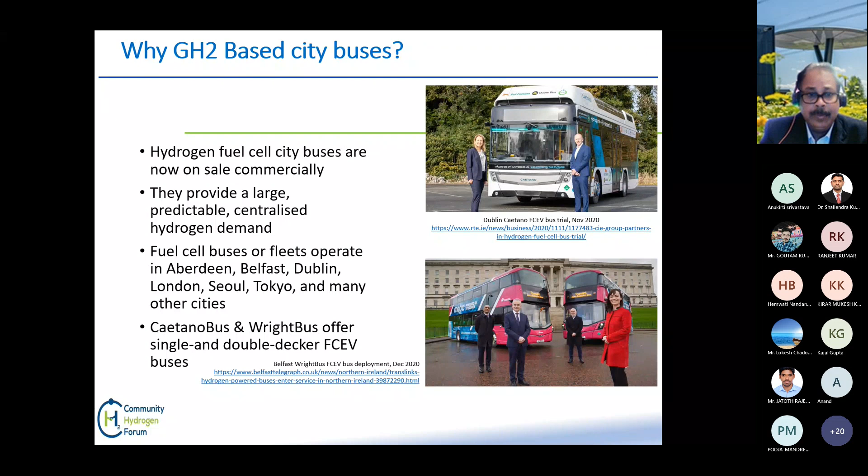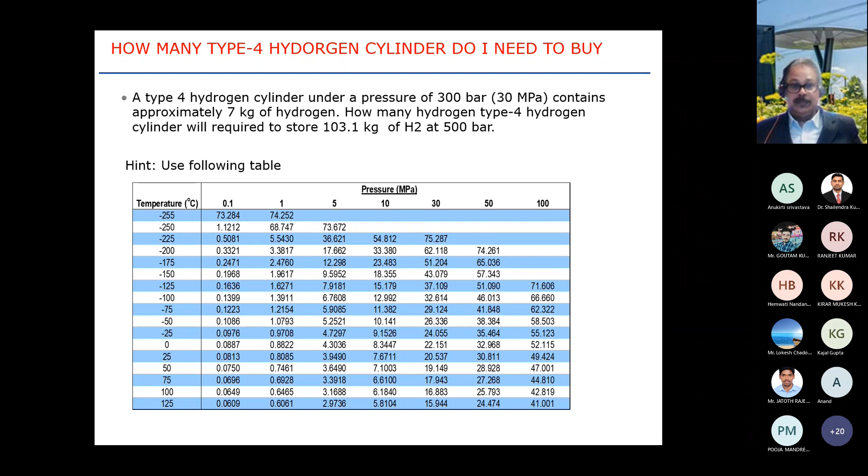Any doubt on this question, you can ask? No doubt? Can you see this table clearly? Yes, sir, it is visible to all. Okay. I'm giving the first hint. Assume 25 degrees centigrade temperature.

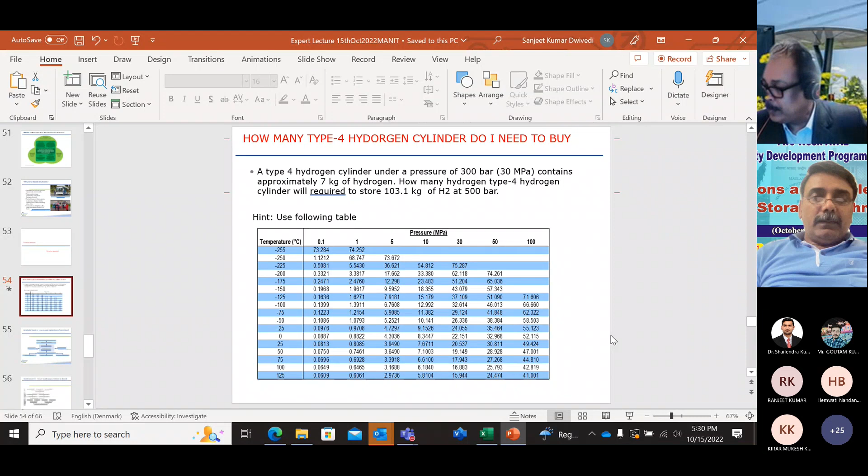We can leave it to the participants. Okay. So nobody is trying to solve it. I can give you the answer, it's a very easy question. Anybody interested to know the answer? How many cylinders? See,

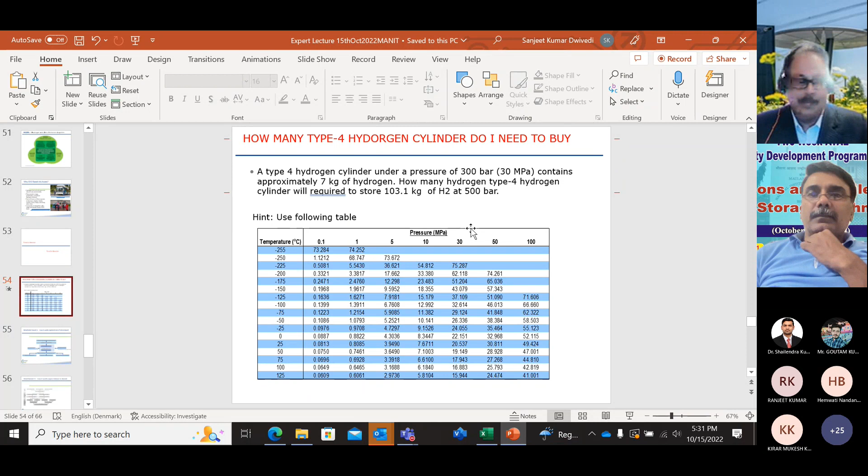you need to define the temperature and pressure first, because under pressure this gas changes its energy density, volume density and everything. So at 300 bar, you see here, at 25 degrees centigrade it contains 20.537 kg per meter cube. And if pressure is increased to 500 bar, it will contain 30.811 kg per meter cube. So the same cylinder which can contain 7 kg of hydrogen at 300 bar will contain 7 multiplied by 30.811 divided by 20.537. That comes to around 10 kg or so.

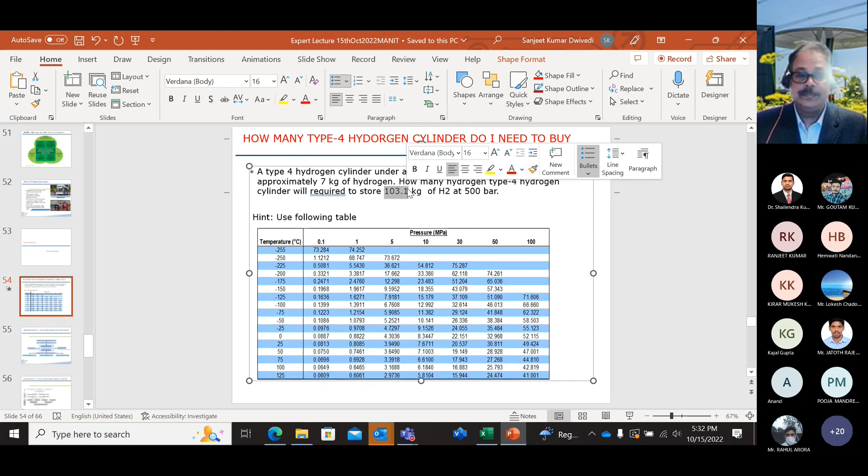So now you know that at 500 bar, this same type 4 cylinder can contain 10 kg, and you need to store this much gas. So you need around 10 cylinders for storing this gas. Is everybody with me? Yes, sir. Okay. So this way we can calculate it, and it's quite interesting. Some of you will join the hydrogen industry, where these calculations are needed, and you must have one or two rows of this table in your head.

As technology managers, sometimes we need to develop a product, and then we order from suppliers like Hexagon, NPROXX and Hanwha around the world, and they have different pressures and different composite materials, and then whether we can transfer the gas through our trucks using those cylinders. These are the practical questions that come up, and that's why I asked you.

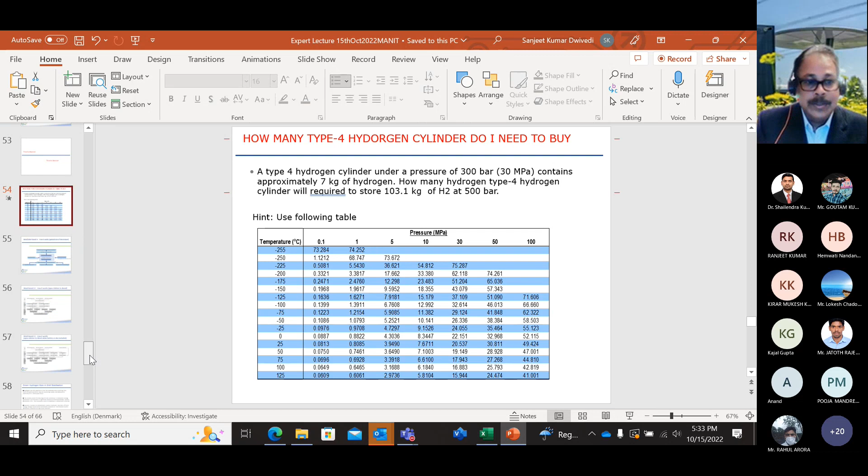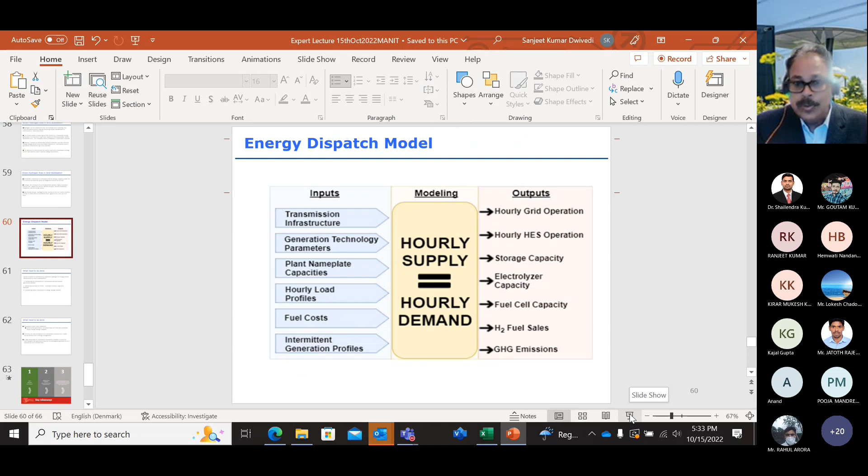And now, as a closing remark, we are very close to the time, and I will not take much time, but I will show you this energy dispatch model, where we can consider transmission infrastructure, generation technology parameters, plant nameplate capacities, hourly load profile, fuel cost, intermittent generation profile, and hourly supply and hourly demand. Then as output, we can give the hourly grid operation, hourly hydrogen energy storage operation, storage capacity, electrolyzer capacity, hydrogen fuel cell capacity, and greenhouse gas emissions.

And so this model is very similar to our power trading model, but here the input and output is in terms of hydrogen infrastructure. So here, you assume a situation where we have our power grid, and parallel to that grid, we have a hydrogen pipe or hydrogen gas network, and all the electrolyzer plants are connected together.

So instead of connecting the renewable energy sources to the power grid, we can decentralize it, and we can connect the electrolyzer plant to produce the hydrogen, and the rate of production of this hydrogen is governed by this energy dispatch model. These different electrolyzers may be 500 megawatt, 1 gigawatt, whatever the size, and they spread around the country, but their output is connected through the hydrogen infrastructure or pipeline, or dispatched in terms of trucks.

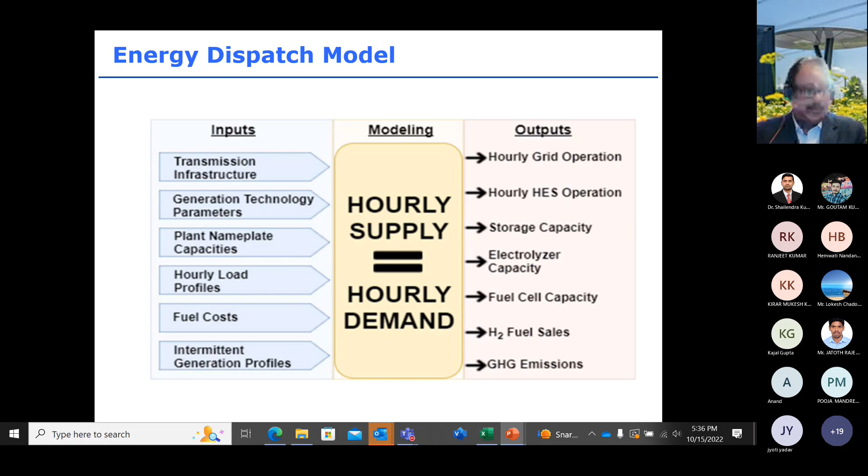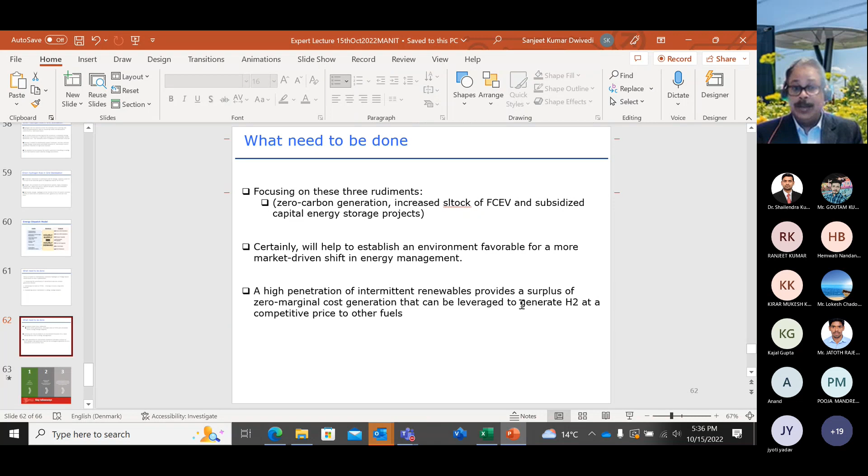Final remark: we have seen that there is a mega trend towards green energy shift. Innovation in green hydrogen technologies, a system level approach gives the greatest benefit, and harnessing the advantage of the full value chain of green hydrogen is an essential component in the success journey of green energy transition.